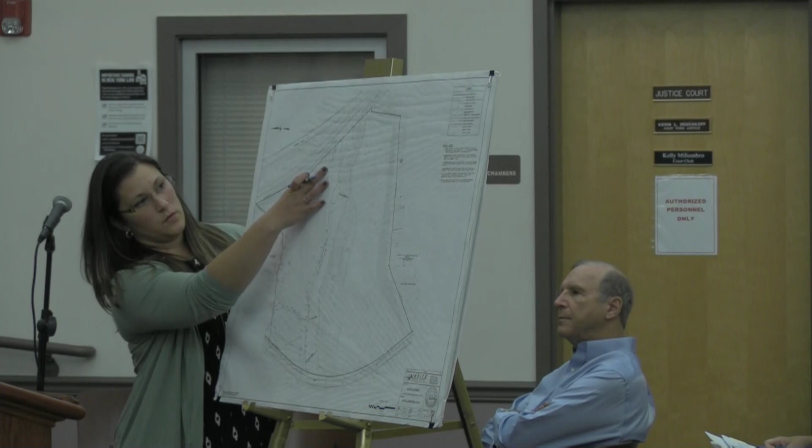The development completed in 2019 is in the southern half of the site, currently a gravel pad. There are 2 stormwater basins constructed as part of that development, in the central portion of the site. We have the wetlands to the north of the property, the southern development, and the 2 stormwater basins. There is also a well on site that will be abandoned as part of this project.

The project before you now is for a warehouse storage facility and its associated functions as part of the Morrow Equipment Company, LLC. They are proposing a 22,400 square foot main building in the front of the property. This is the main building here.

A 6,450 square foot building for washing and painting of the equipment. Asphalt parking in the front, concrete work areas surrounding the buildings, and gravel work storage areas in the back. Landscaping, lighting, and fencing are also proposed. A new well and septic are also part of this project.

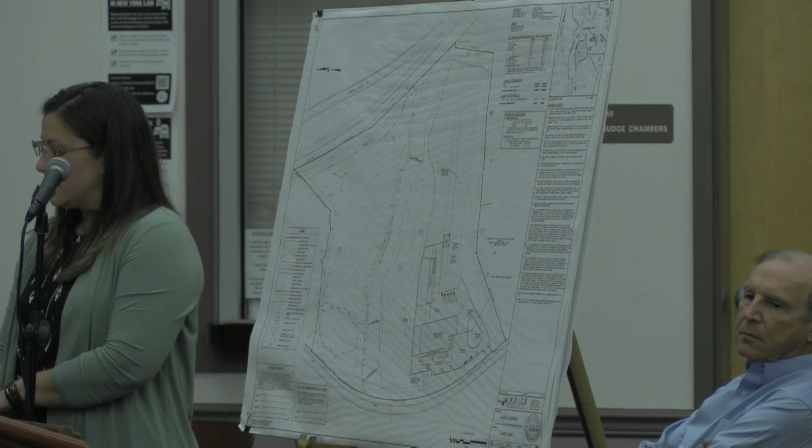There are 2 variances we're looking for, which I'll get into slightly, but Jennifer will get into a little bit more: the crane and the stacked inventory. The crane, in my opinion, is pretty cool.

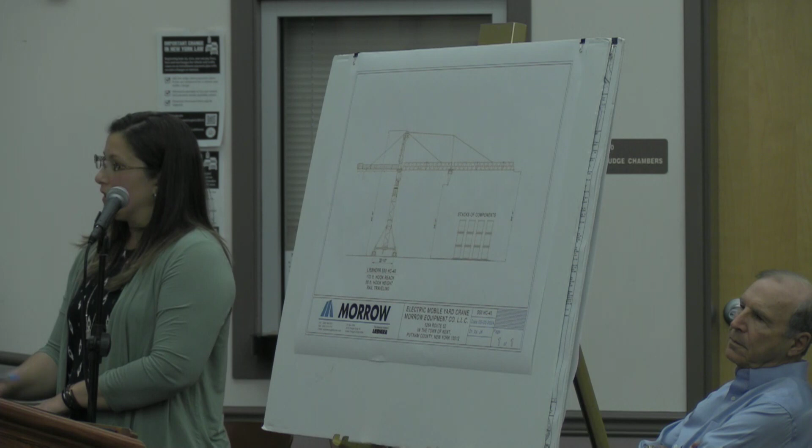Who doesn't love a crane? The crane itself is 99 feet high. It's mobile and electric, a tower yard crane, remotely operated from the ground. It's located behind the building, so a lot of it will be obstructed from views in the surrounding areas. It runs on 2 rail systems, basically east and west on the property in that development pad, with a 360 degree swing of the boom for operations. The variance we're requesting for the crane is a 59-foot variance, because it is 99 feet where 40 feet is permitted for a structure.

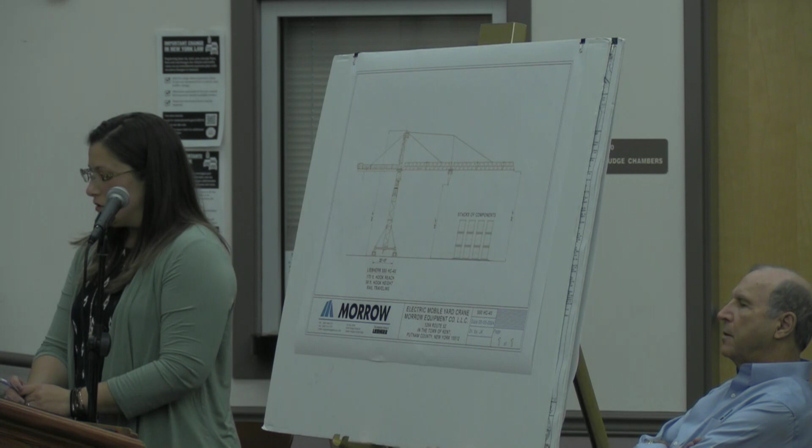The stacked inventory is the other variance we're seeking. That pertains to the neatly organized crane pieces that are stacked on top of each other to be roughly 32 feet high. The crane itself is like 8 by 8, and they stack on top like Tinkertoy kind of stacking, that's the only way I can explain it, sorry. The variance we're seeking is a 22-foot high variance, where 10 feet is permitted and 32 feet is proposed.

The project is proposing 15 to 20 employees on site daily, between the office and the yard itself. We don't anticipate visitors, but we do have an allocation for parking in front in case there is an occasional visitor. Hours of operation are Monday through Saturday, 7 a.m. to 6 p.m., and a very occasional Sunday, 8 a.m. to 5 p.m.

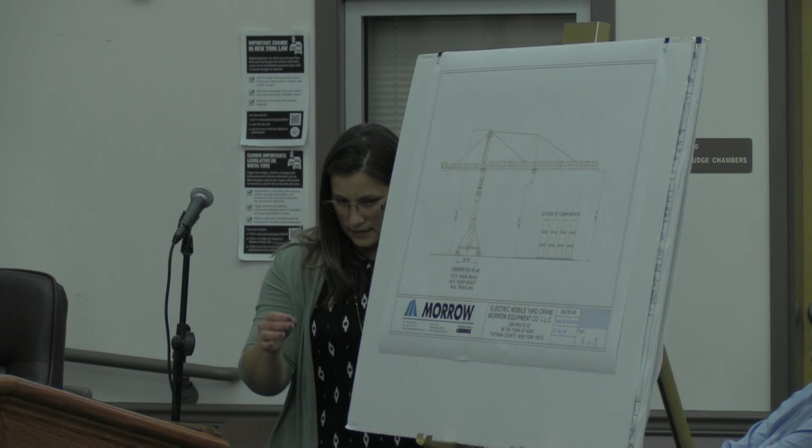Yeah, I was gonna say, I can't really hear.

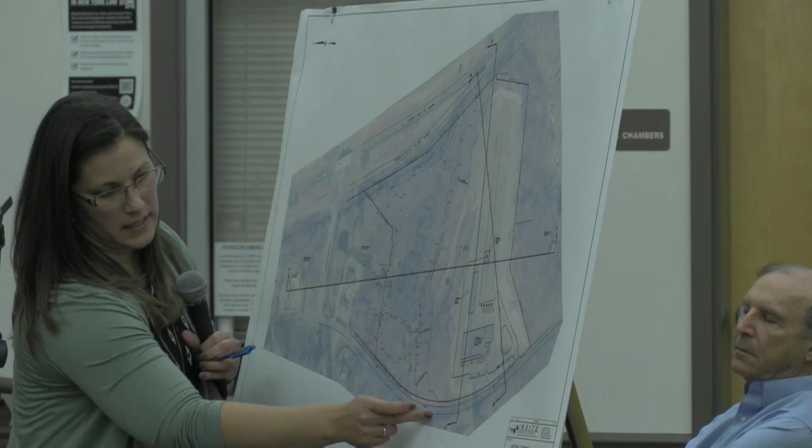Sorry. The existing wetland areas here, there's the 2 stormwater basins, the new wash building, the crane on the rails, the large slope, and then the pet hospital. The other 2 sections we've pulled are generally from close to the main entrance, running through to the back of the site to 84, and then further down the hill as the grade change dives down toward the wetlands here.

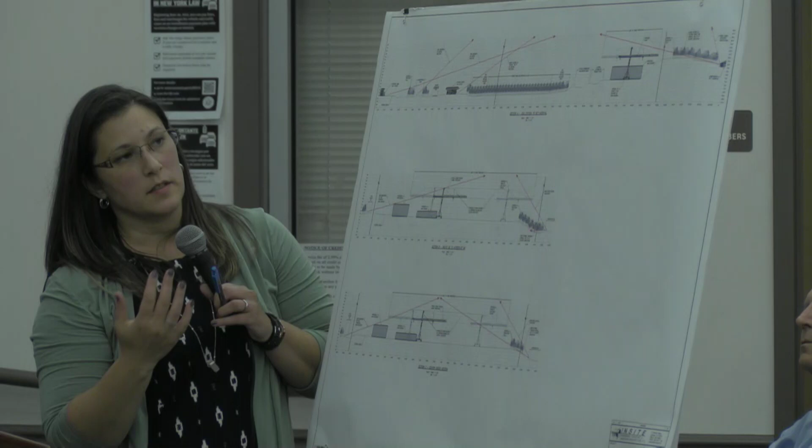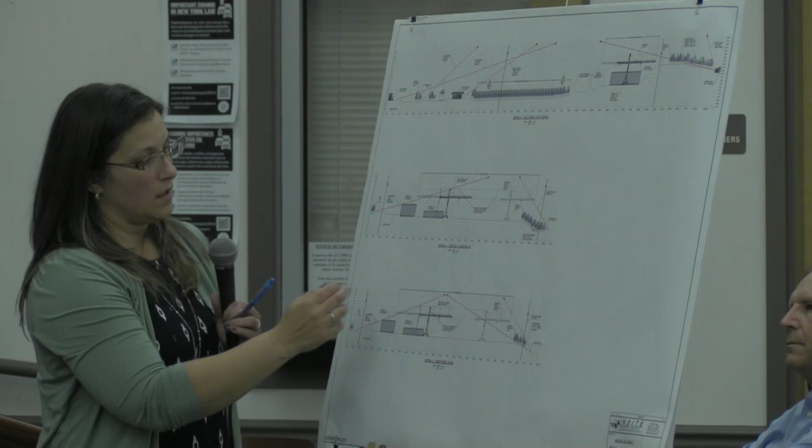These begin to show you generally what would be visible from the surrounding areas. We don't ever want to say that this will never be visible, because there may be glimpses in certain areas, but from the 2 gas stations, between the distance and the existing vegetation, you'll have very obscured views. From the pet hospital, you have existing vegetation, filtered through about 250 feet of it. Because of the ground elevation and grade change, you look over the top of the crane. From Route 52, closer to the entrance, you have basically a view cut off by the main building.

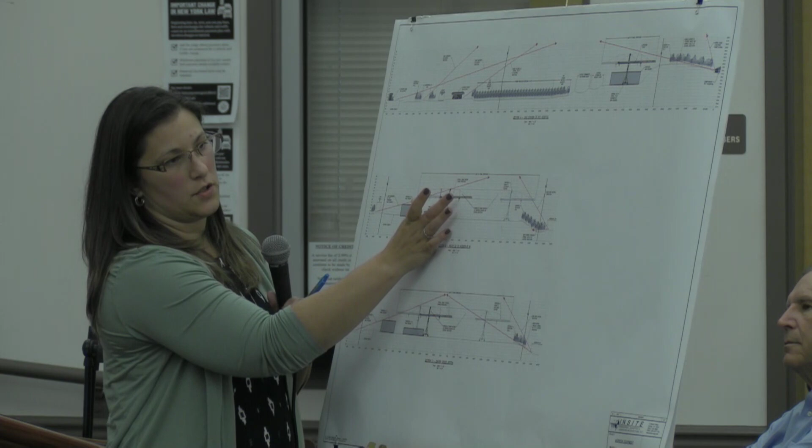So this actually helps to show the extent of where the crane operation will be. From here to here are the limits of where the crane will operate. Majority of the time, the crane will operate in this general vicinity, with the boom facing the 84 direction. So there's a small area of the crane that would be visible from 52, and again from 84 would be a very small area as well.

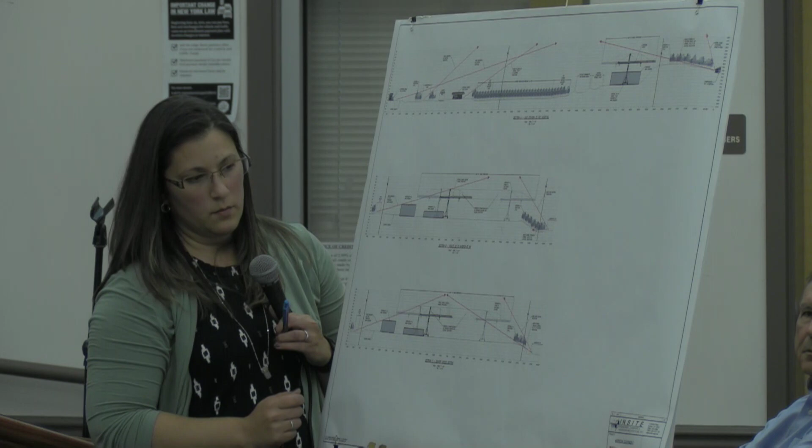So there's a large portion that would not be visible, or would have very filtered views, between the main building and the existing vegetation. Again, from the other areas with the grade change along 52, looking at the top of the building, very small portions of the boom would be visible. 84 is a little more visible, but there again is existing vegetation that would filter that view.

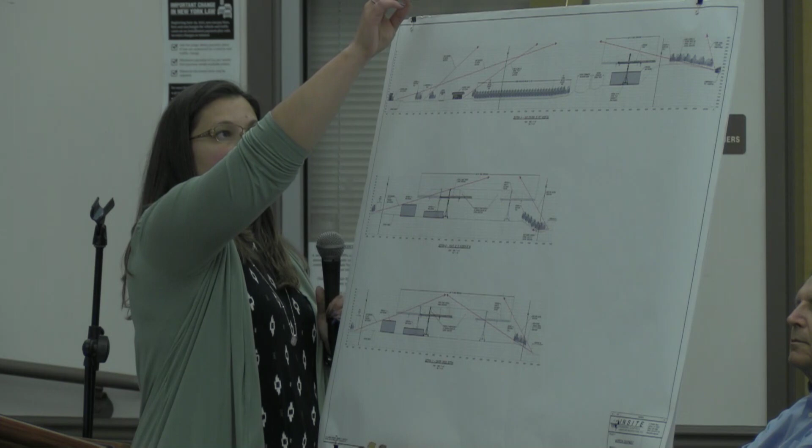So we'll hand this over to Ron to give us a little more information about Morrow Equipment. Can I just ask you one question before you hand it over? Sure. What is the length of the boom? Do we know?

It doesn't say. And the counterweights? It's on the other drawing. I think it's about 180. 180? Okay, we can verify that, yes.

Good evening, I'm Ron Yakin, Morrow Equipment. Morrow Equipment is the largest tower crane company in the United States. We have approximately 18 offices throughout the major cities. Locally here, we've been based in Millwood, New York for over 50 years now, and we've outgrown that facility, so this site became available, and we thought it's ideal for our type of operation. It's close to 84, so any traffic, truck traffic, could get right on 84.

Morrow has done most of the major projects in the United States. If you look in White Plains, you'll see a number of our cranes in New Rochelle, New York City, and we also helped rebuild the Pentagon after 9/11.